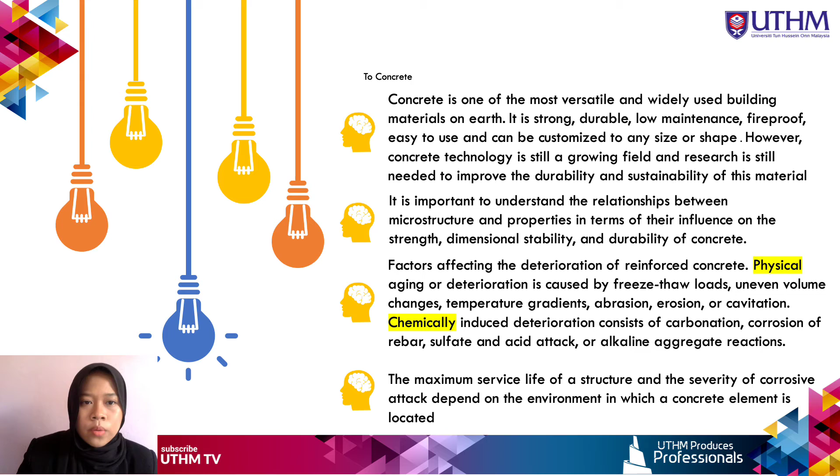Okay, so for the introduction, we all know that concrete is one of the most versatile and widely used building materials on Earth. It is strong, durable, low maintenance, fireproof, and easy to use, and can be customized to any size or shape. However, concrete technology is still a growing field, and research is still needed to improve the durability and sustainability of this material. It is very important to understand the relationship between the microstructure and properties in terms of their influence on the strength, dimensional stability, and durability of concrete.

The factors affecting the deterioration of reinforced concrete are based on physical and chemical factors. Physical aging or deterioration is caused by freeze-thaw loads, uneven volume changes, temperature gradients, abrasion, erosion, and cavitation. While chemically induced deterioration consists of carbonation, corrosion of rebar, sulfate and acid attack, or alkali aggregate reaction. So the maximum service life of a structure depends on the environment in which the concrete is located.

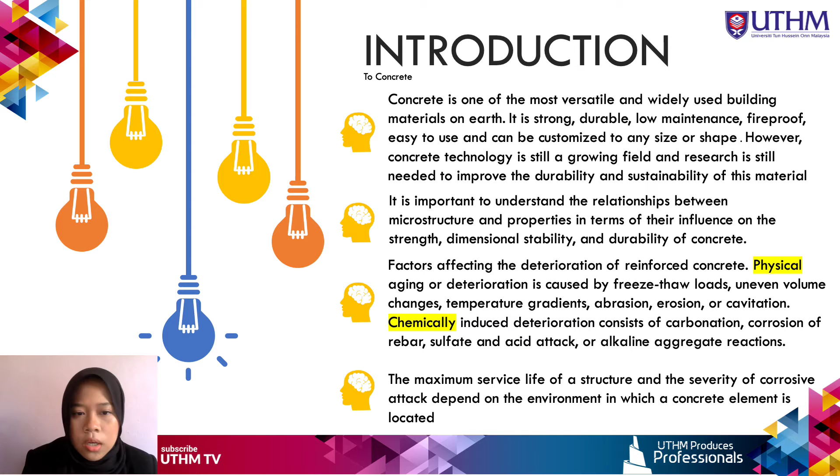So next, we'll go for the problem statement. The first one is all the research regarding concrete and other types of material has been made to determine its physical and mechanical properties. The second one is none of the research studies the actual characteristics and properties of concrete alone without the existence of other materials and composites. And the third one is, from the research gap, there is a lack of advanced study to determine the mechanical and physical properties of concrete. This will help to produce reliable data for engineers to refer to for their future works or projects, especially for bridge application.

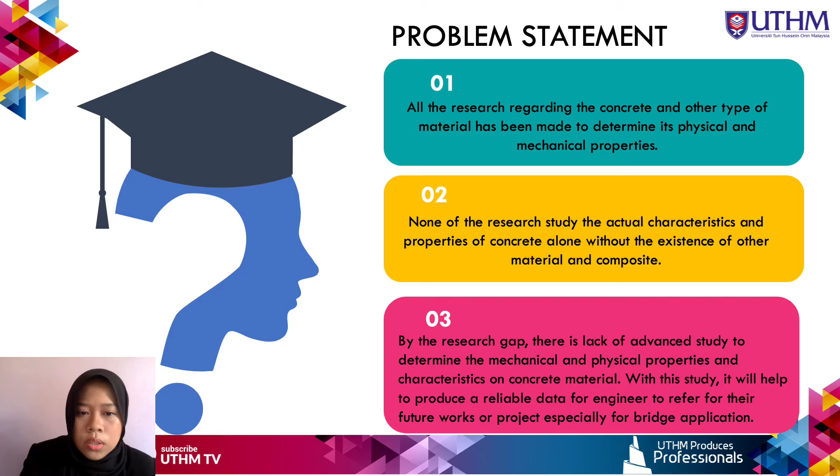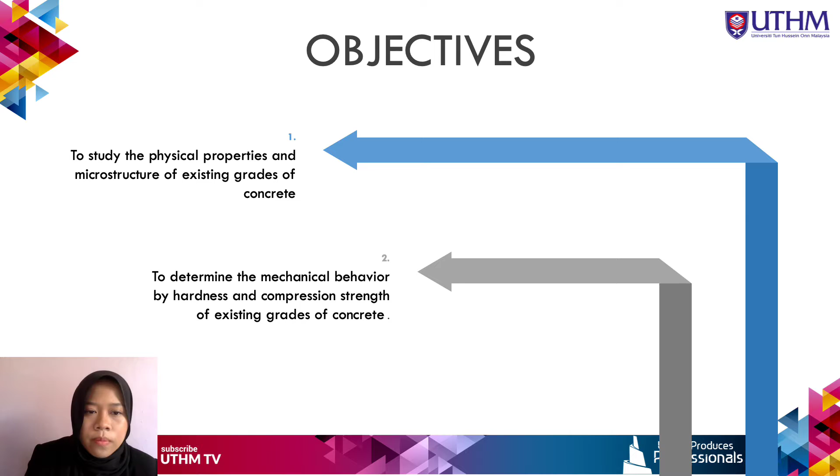So, objectives, there are two objectives. The first one is to study the physical properties and microstructure of existing grades of concrete. For the grades, my study will be based on grade 30 and grade 40. And the second objective is to determine the mechanical behavior by hardness and compression strength of existing grades of concrete.

So we will go for the scope of study. There will be a total of 6 scopes for the study. The first one is types of concrete. The cube test concrete will be supplied by MMC Engineering Sendirian Berhad, with different grades, grade 30 and grade 40, with 7 and 28 curing days. The second one is the X-ray fluorescence (XRF) test will be used to characterize the element composition for each grade of concrete. The third one is the compacted concrete powder samples will be prepared and then sintered in a muffle furnace at 1000 degrees Celsius.

The fourth scope is samples of concrete will be prepared for physical testing to determine the water absorption, porosity, and density. The fifth scope is the mechanical behavior of concrete will be investigated through the hardness and compression tests. The last scope is the optical microscope and scanning electron microscope will be used to observe the microstructure of concrete.

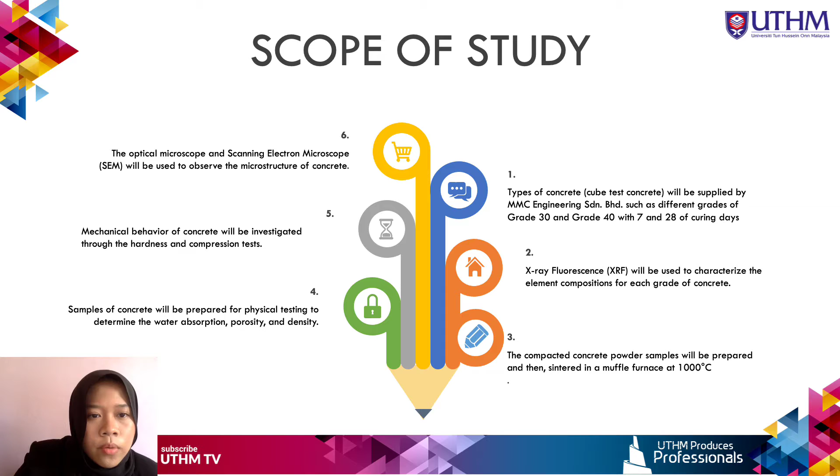So we will go to the literature review for the next slide. This is my literature review. For the literature review, I've used and read a lot of journals regarding concrete, its types, and also its composition.

So for this table, I've categorized it into different types of concrete with different authors. The first one is ordinary concrete by Olga, the second one is high performance concrete by Shanagonda, the third one is steel fiber reinforced concrete by Xingwei, and the last one is lightweight concrete, preformed foam concrete, by Meshkumar.

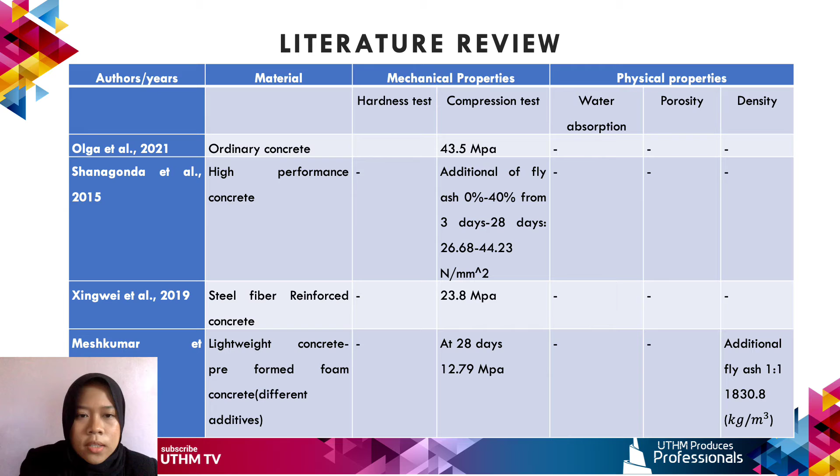As you can see, this table is one of my ways to compare their outcome with my outcome, so it will be easier. Based on the mechanical and physical properties stated, we can see that only the compression test has been tested for most studies. For ordinary concrete, it can be seen that it is 43.5 megapascal, and there is none for physical properties testing for water absorption, porosity, density.

For high performance concrete, only the compression test has been tested for the study, while there is none for physical testing. For steel fiber reinforced concrete, the compression test has been tested as well, but none with physical testing. And the last one is Meshkumar. It can be seen that the compression test has been tested with a density test as well.

So only Meshkumar has studied both mechanical and physical properties, but none of the studies provide all of the mechanical tests, hardness and compression, and physical tests, water absorption, porosity, density. None of the studies is complete in studying the characteristics of the concrete.

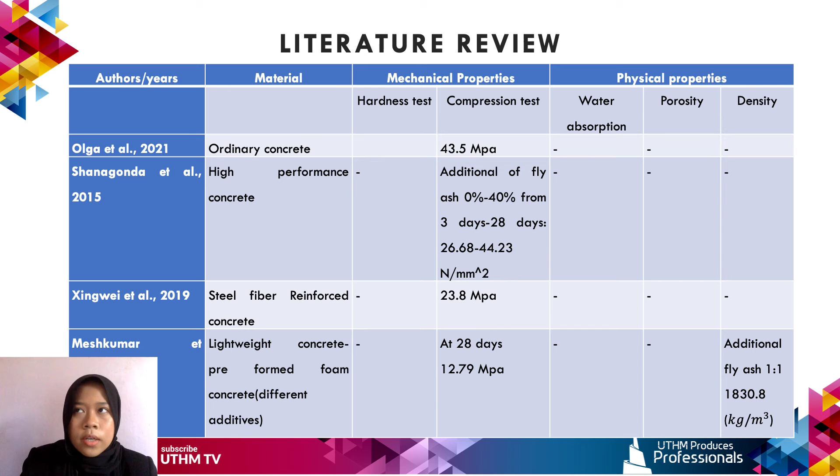It can be seen as well that none of the other authors studied the concrete only. The concrete is always mixed with a different kind of material or a different kind of composition. So that is for the literature review, and we will go to the flowchart.

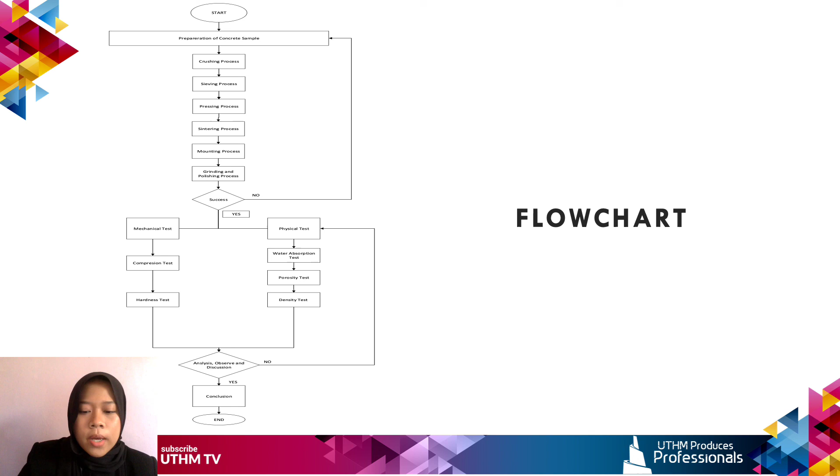The sample will go through the physical test and mechanical test. For the sample size, the diameter will be 1.2 centimeters, and there will be two different heights, 1 and 3 centimeters. There will be a total of 16 samples produced to go through the mechanical and physical tests. So I think that's all.